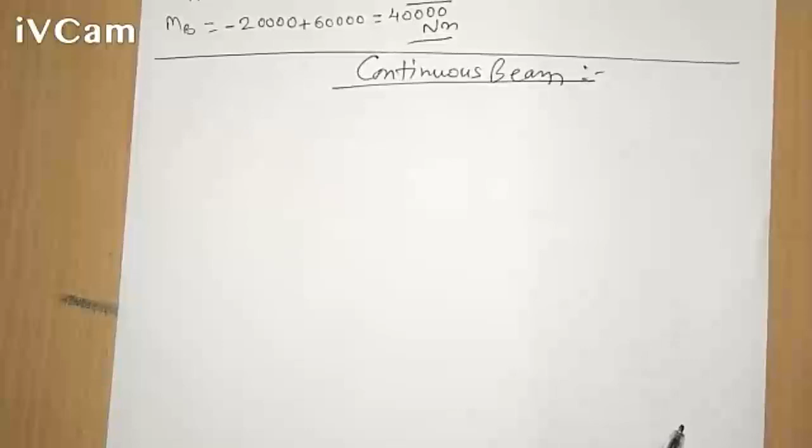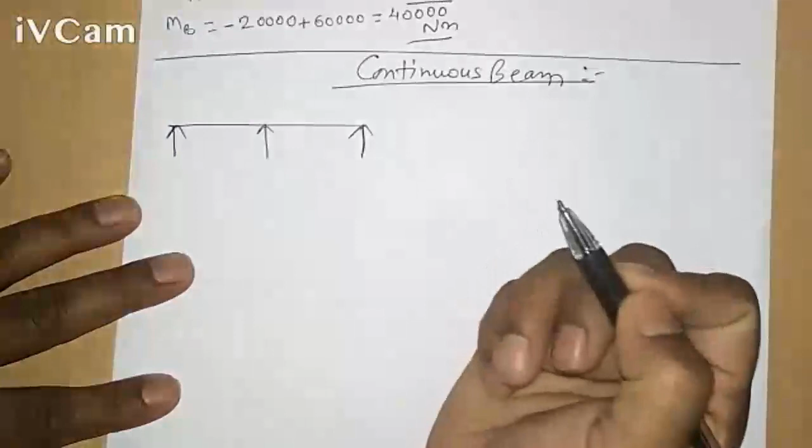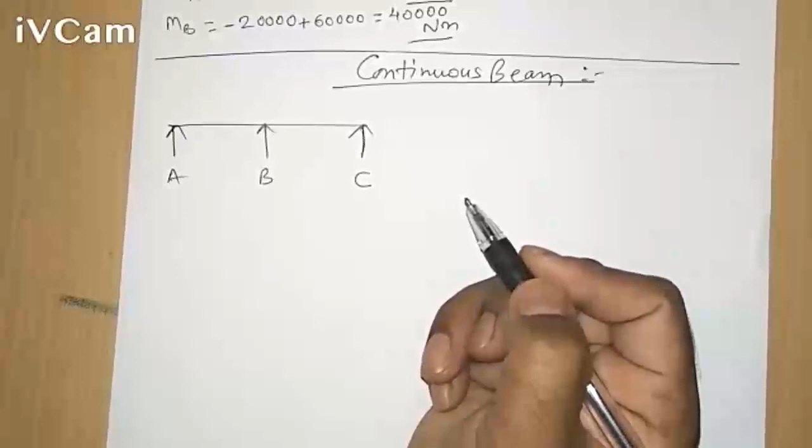Okay, so let us start with the continuous beam today. In earlier videos, we have gone through the fixed beam, and we have also gone through the analysis of the support, how to solve that problem. A continuous beam, when it is supported on more than two supports, is called a continuous beam. Suppose this is a beam which has more than two supports, so we can say this is a continuous beam having supports at A, B, and C. These are the three supports resting on the beam, and that is why we call it a continuous beam.

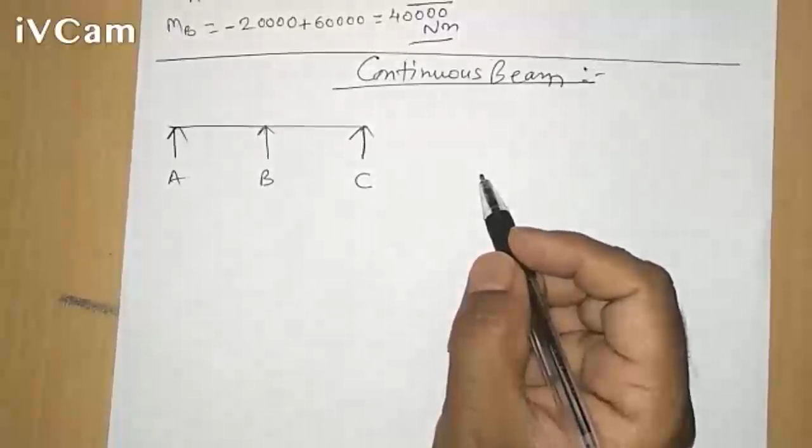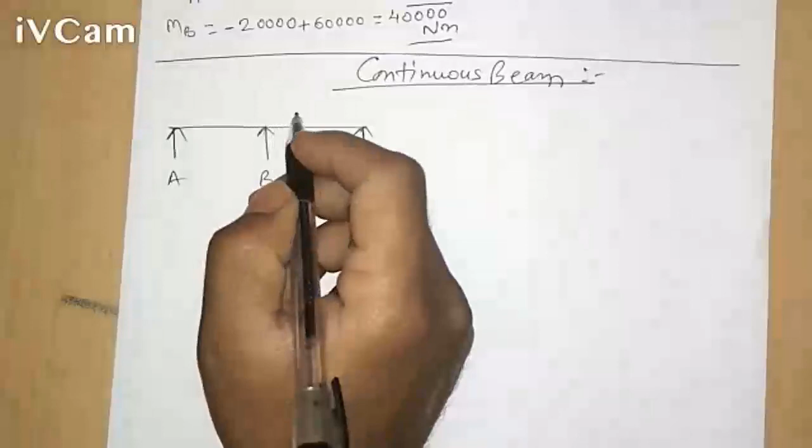So whenever these kinds of beams are loaded, they will deflect in the form of a curve. At the intermediate support, the slope of the elastic curve - suppose this is the intermediate support - if we consider the slope of that particular elastic curve for the two spans, it will be the same. If we consider this as the deflection, this is a deflected shape.

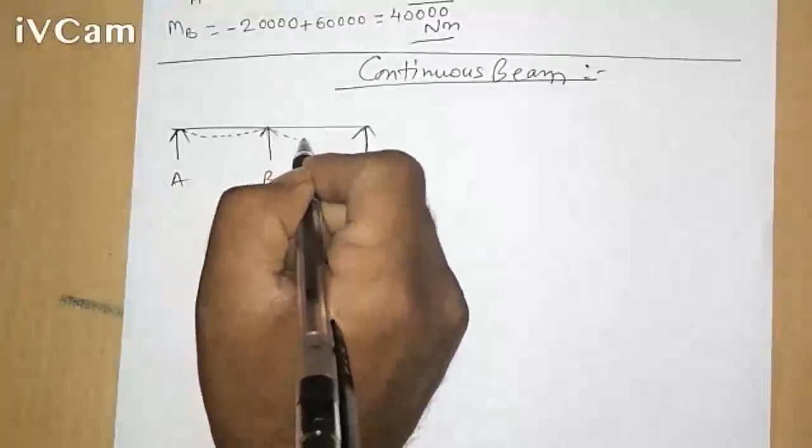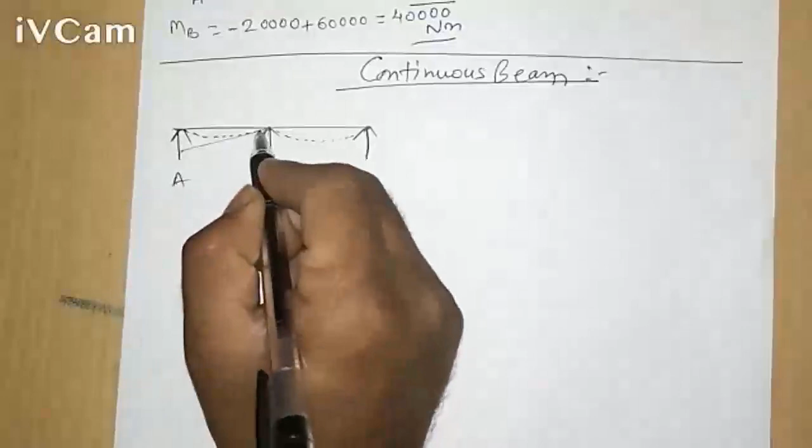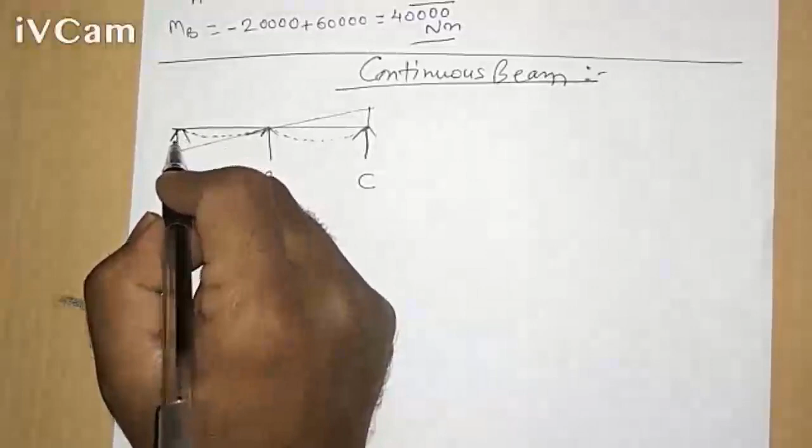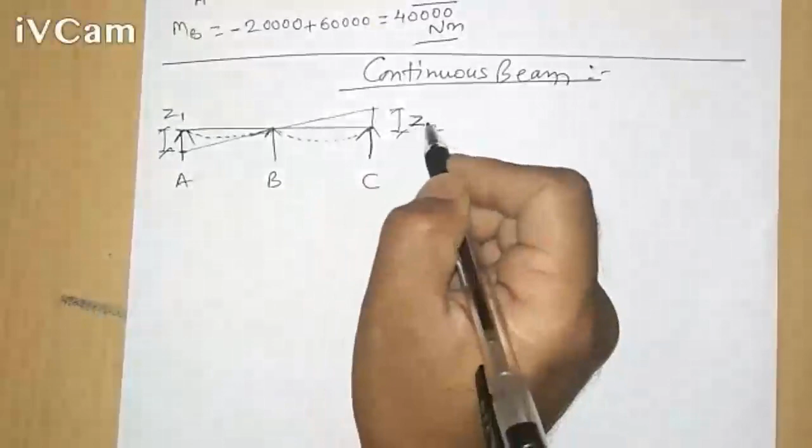Now, if we consider the slope, let us draw this - if I draw a tangent over here, this one is there and this one is there. Suppose we consider this as Z1 and this one as Z2. Let us consider this as span L1 and this is span L2.

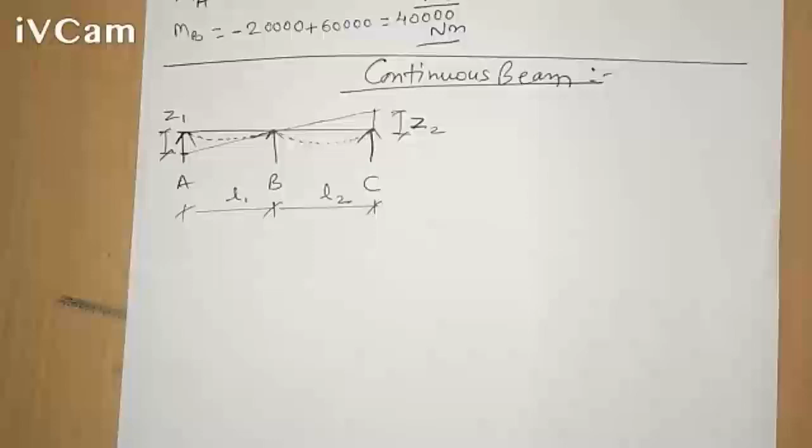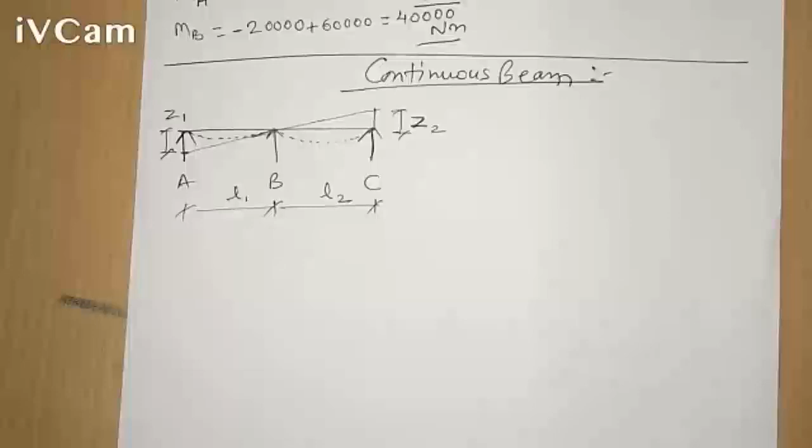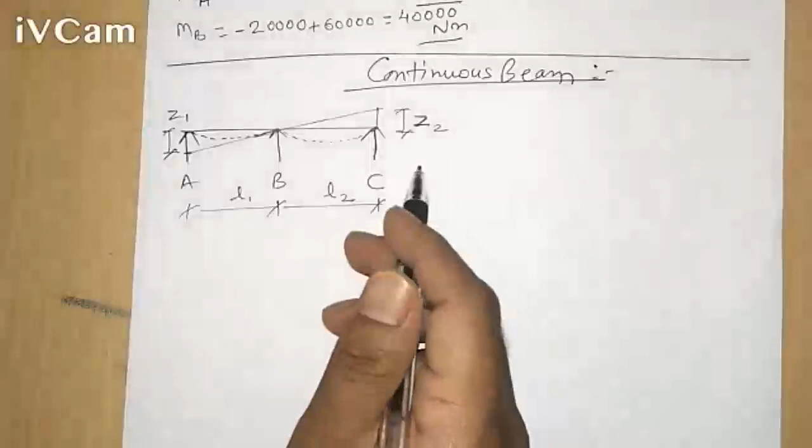Suppose if we consider that at the end support, these end supports are simply supported - in that case, the bending moment there will be zero. And if the end is fixed, there will be a fixation moment, and in that case the slope at this fixed end will be zero.

So moment of inertia - whenever we want to calculate the moment of inertia of the beam, in different spans it may be same or different. It depends upon the span, how that span is, and it totally depends upon it.

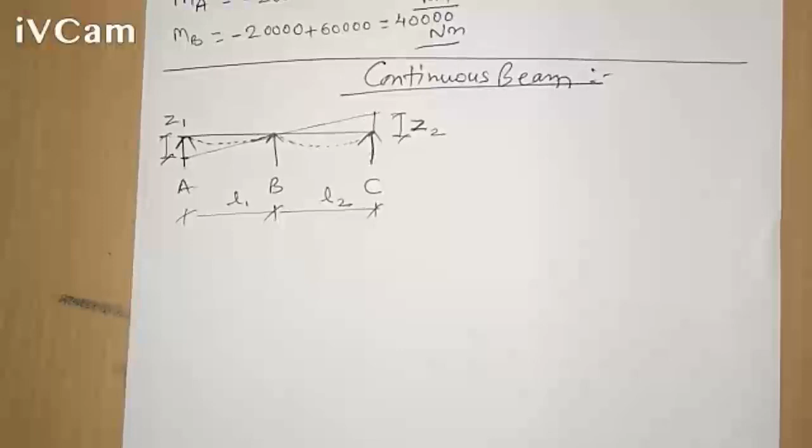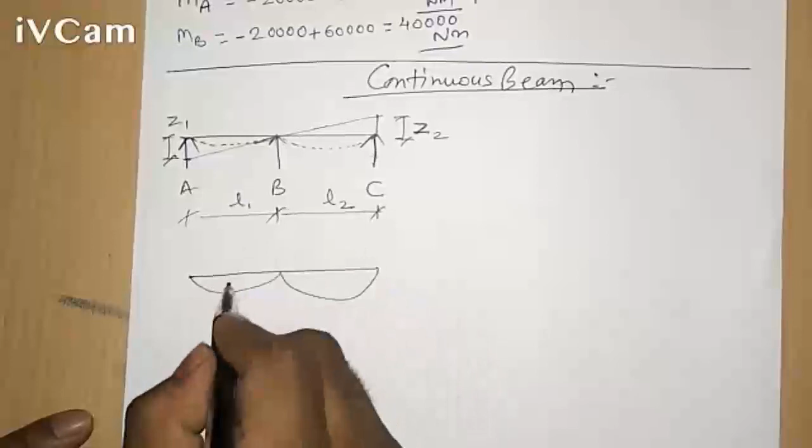So suppose we take this one, and if we draw the simply supported bending moment diagram for this beam, in that case it would be like this. If we consider this as positive, this is nothing but the simply supported bending moment diagram.

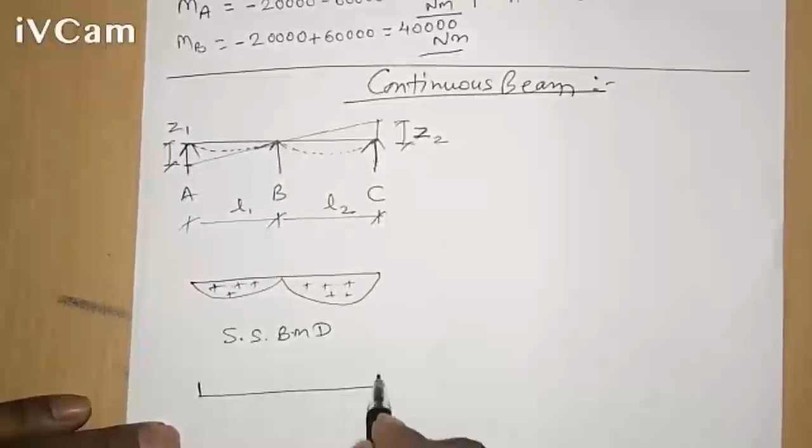While if we consider there is a fixed end at point A and C, in that case we can say there will be a fixed end moment, and this would be like this. So let us say this as MA, MB, and this one as MC.

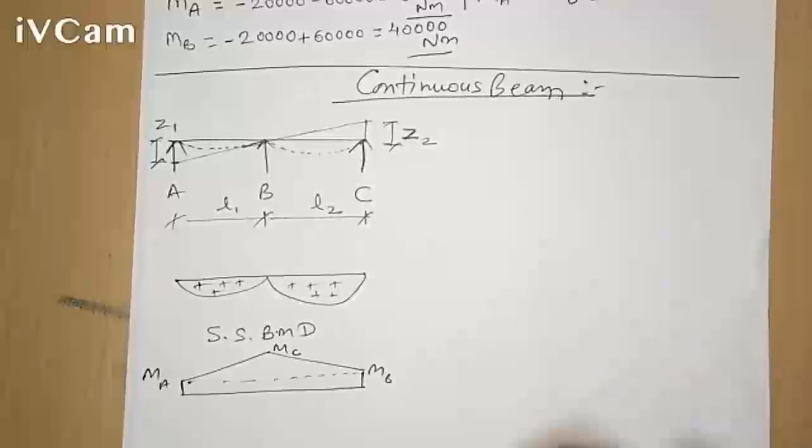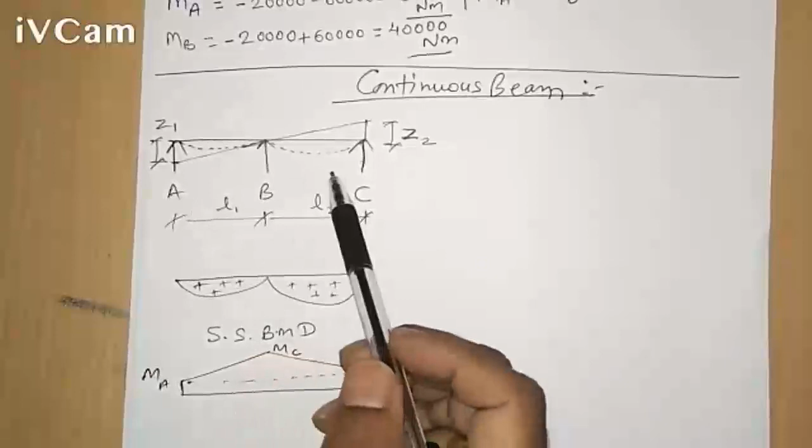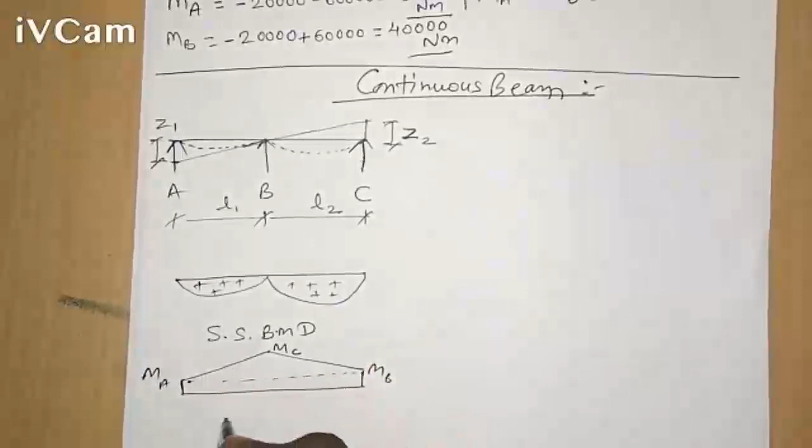So what we are considering is this continuous beam, and in the continuous beam there are more than two supports - just like here, there are three supports A, B, and C. Now, whenever we want to consider this, let us first calculate the bending moment diagram for the simply supported case and the fixed end moment diagram. This one is the fixed end moment diagram. So these are the two different diagrams you need to draw.

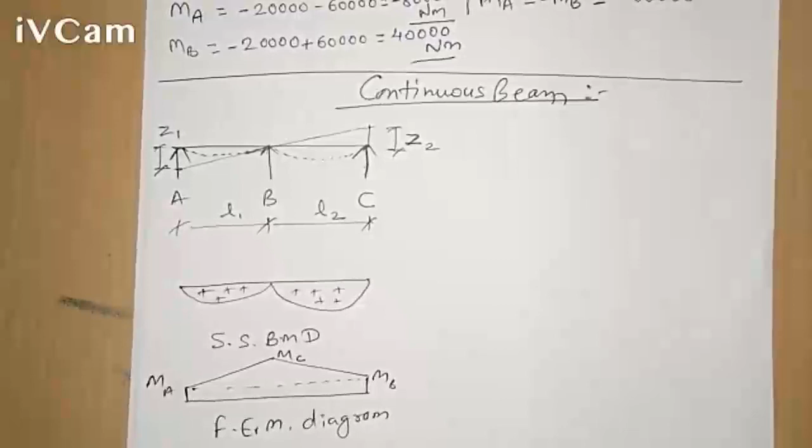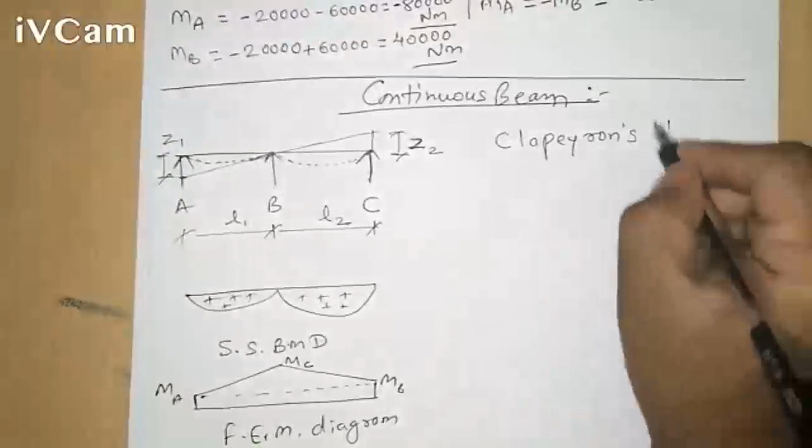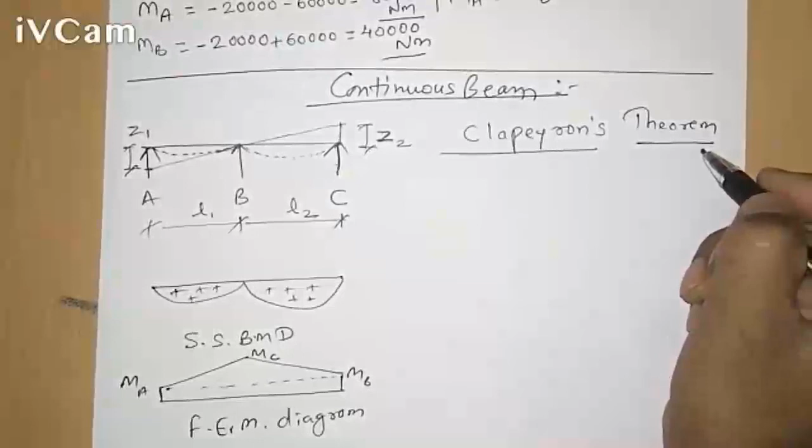And based on this, there is a theorem which is by Clapeyron - Clapeyron's theorem. This is basically the three moment theorem, it is also called the three moment theorem.

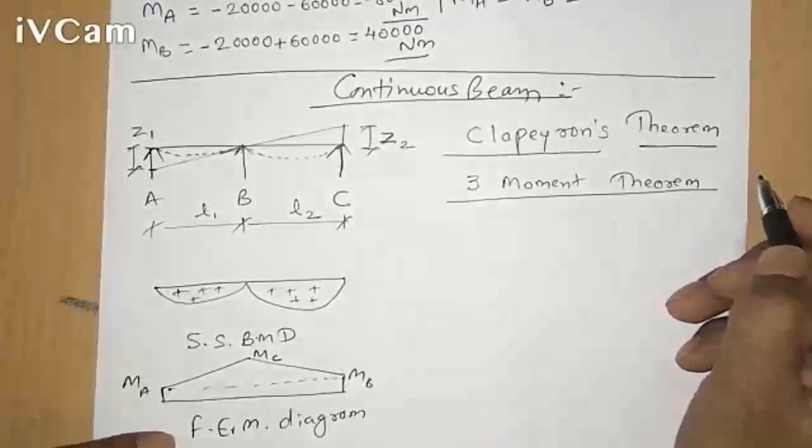So if we just consider, we will directly go on for the form of that particular equation, or the theorem that we will see.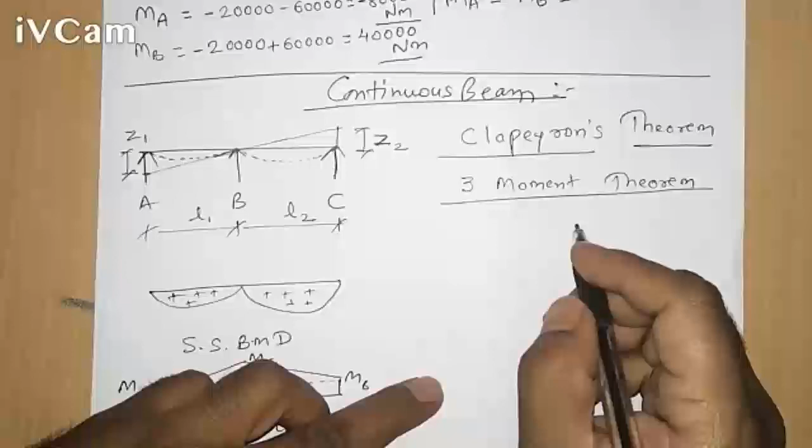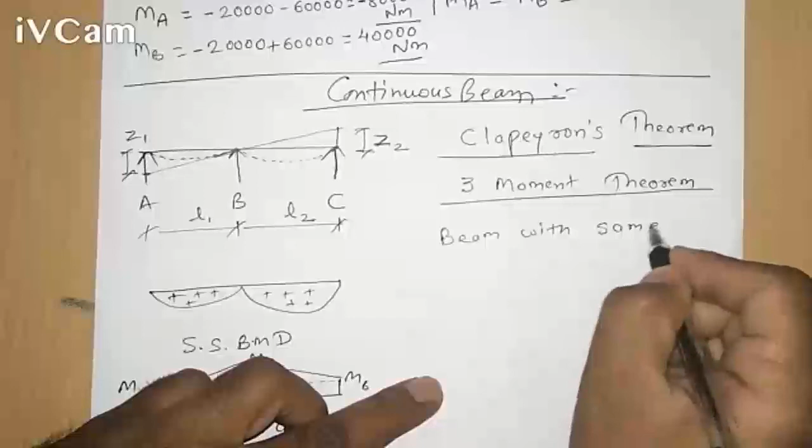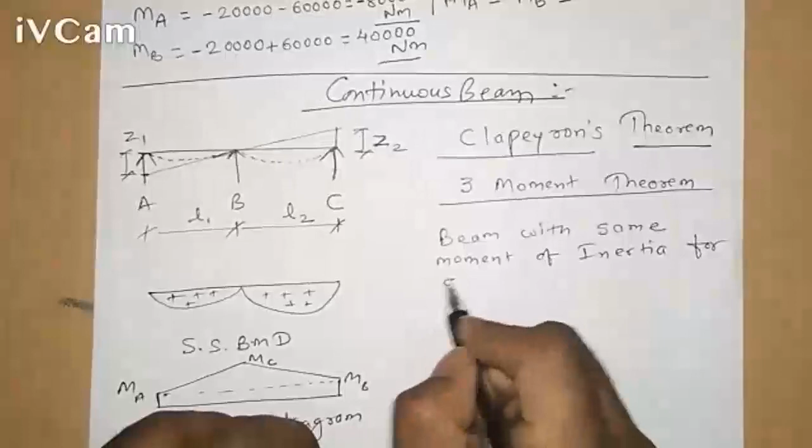So suppose there is a beam with same moment of inertia, for different spans. What does this mean? It means that I1 would equal I2, or that would simply be I in that case.

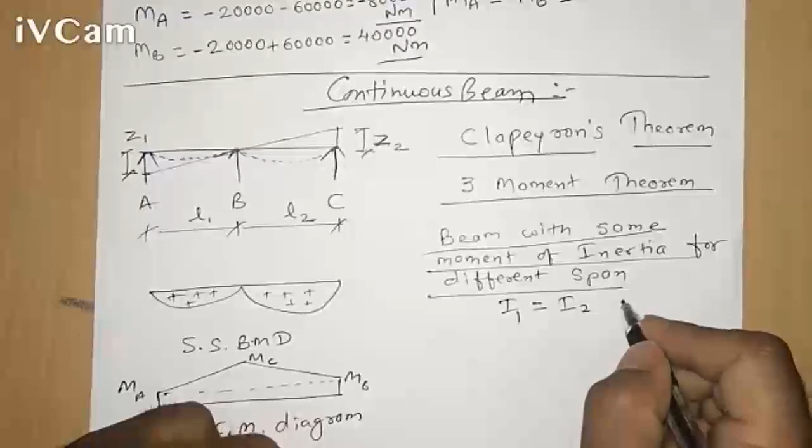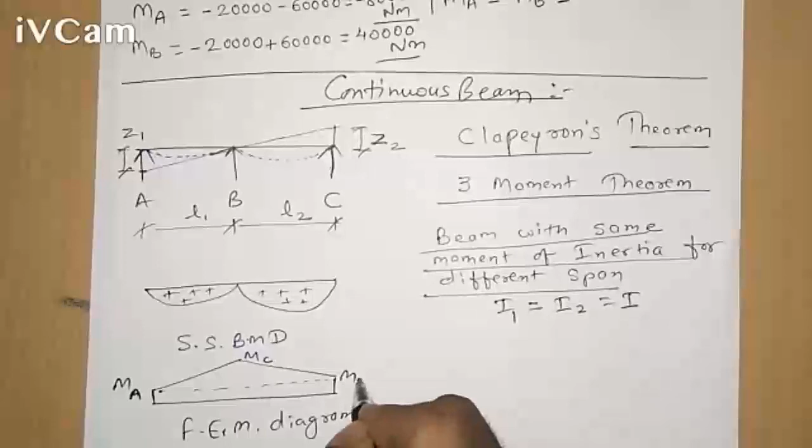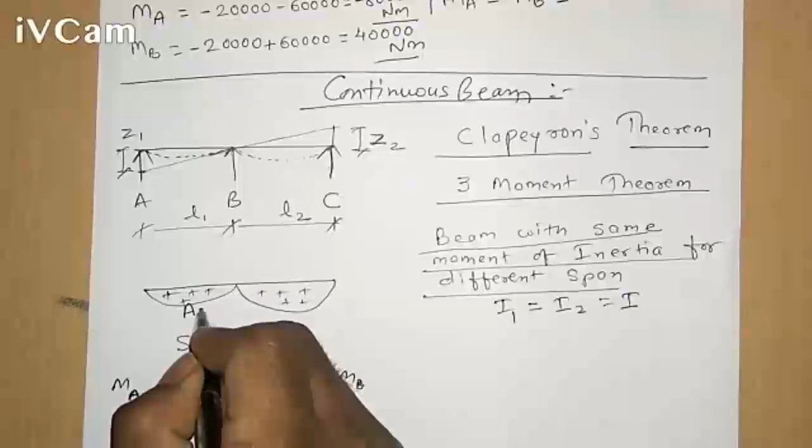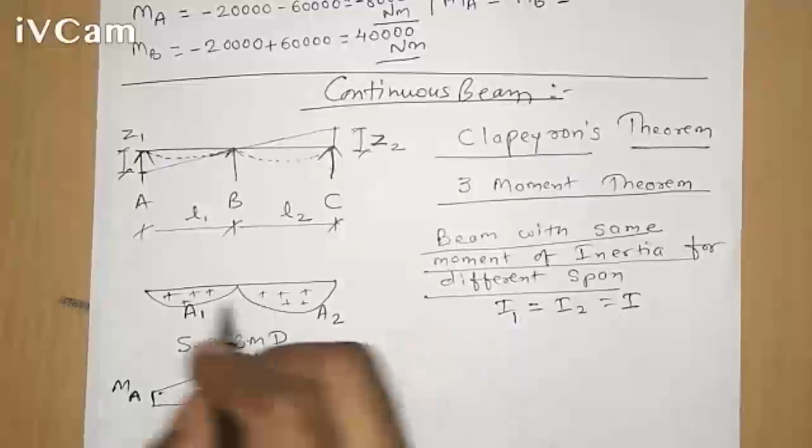Now in this case, we got here MA, we got here MB, and this one is MC. Let us consider this as A1 and this as A2. A1 and A2 are the areas of the bending moment diagram for the simply supported load, considering the case. Now let us take this one as x1 and this one as x2. X1 and x2 are the distances of CG for area A1 and A2.

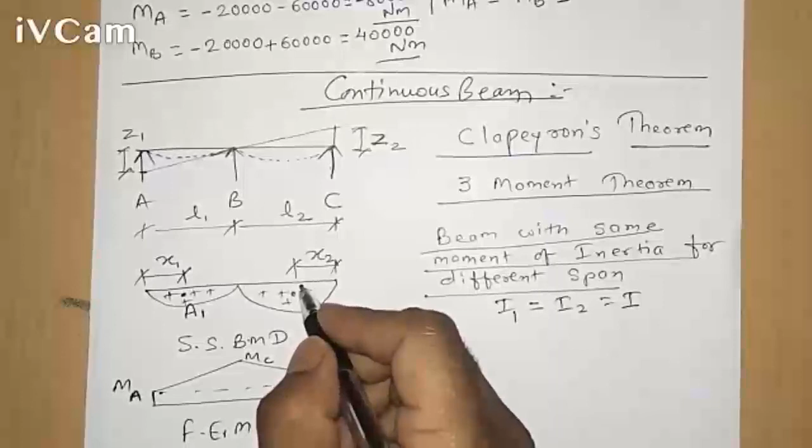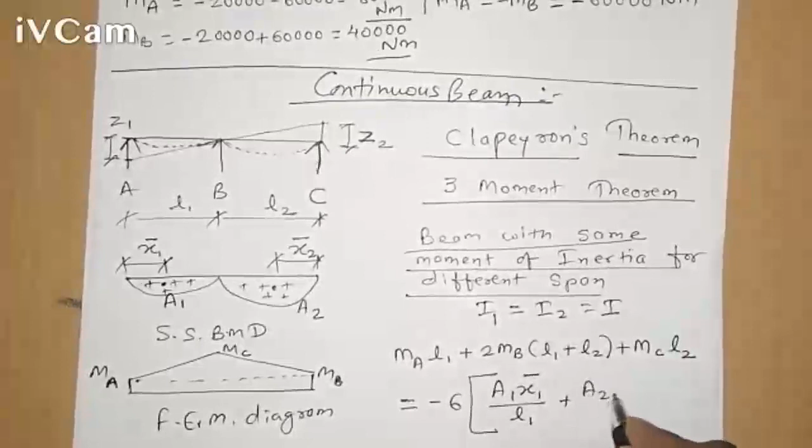Now, what does this Clapeyron theorem say? The Clapeyron theorem suggests that MA into L1 plus twice MB into L1 plus L2 plus MC into L2, this is going to be equal to minus 6 times A1 x1 bar divided by L1 plus A2 into X2 bar divided by L2.

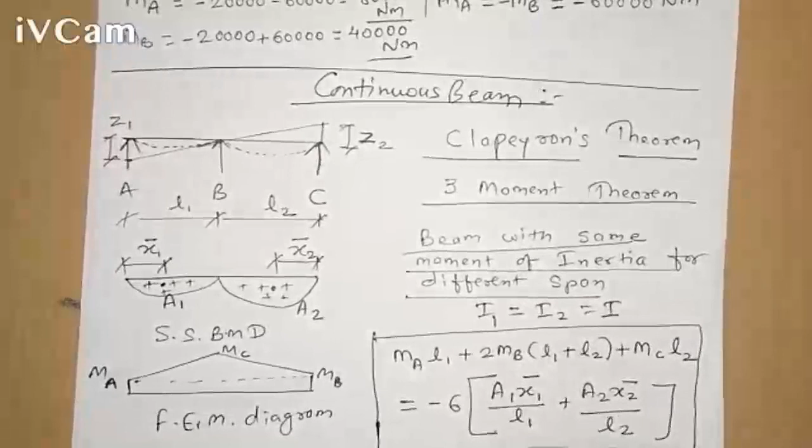So this one is the Clapeyron's theorem, and this is also called as three moment theorem, when I1 equals I2 equals I.

So you can just draw this one and write down this equation. I'll give you just 1 or 2 minutes for this.

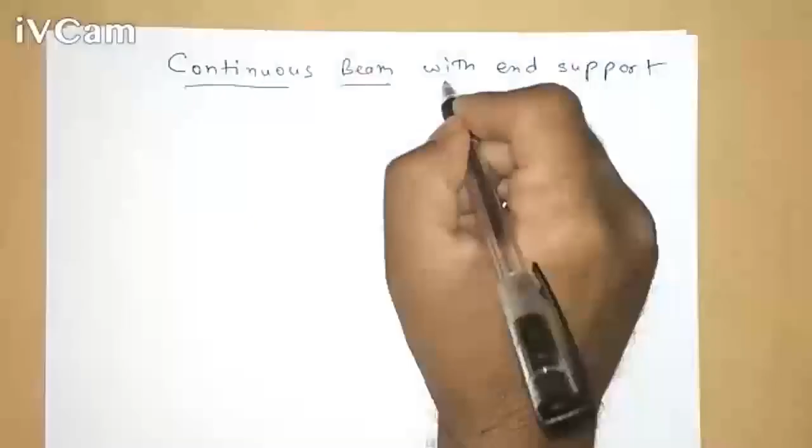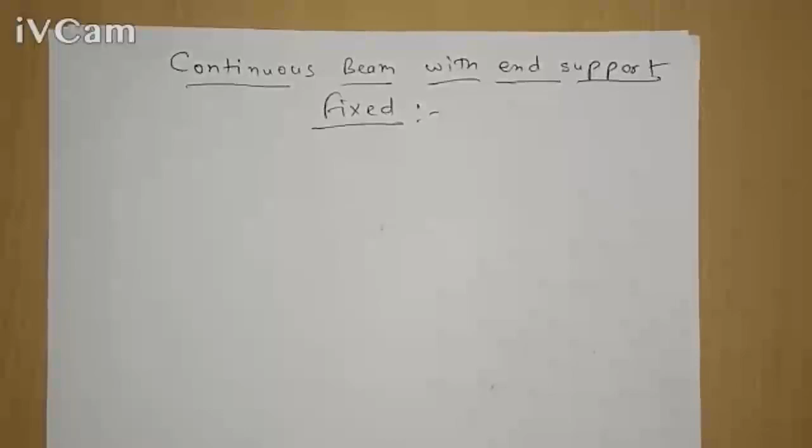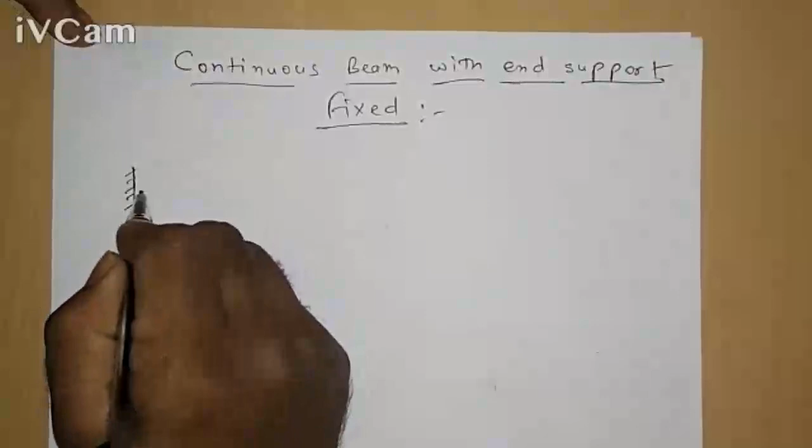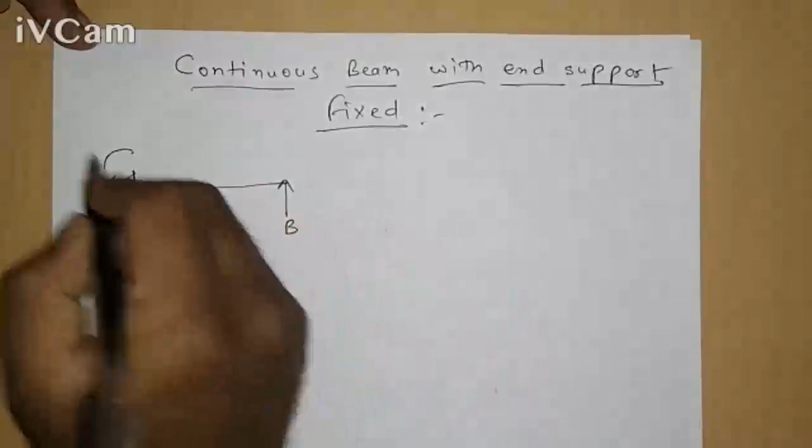So suppose there is a continuous beam with end support fixed. With end support being a fixed one. So in this case, suppose this is a fixed one and there is one support over here. Now because of this, let us say this is A point, this is B point. So because of the fixed support, you will have the moment here, and this moment will also be at this point B.

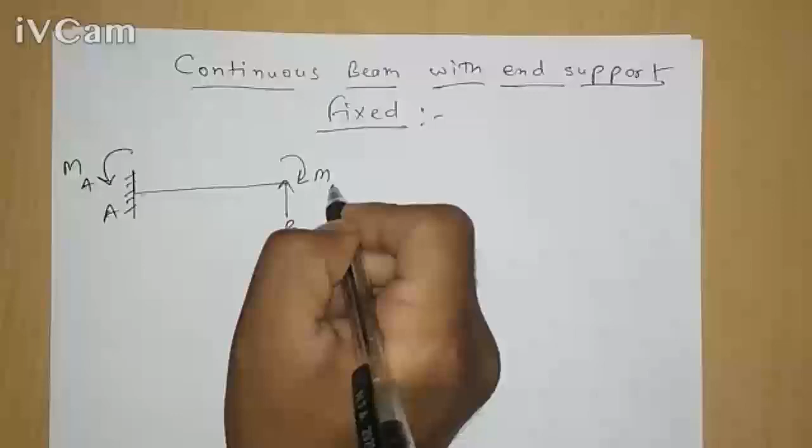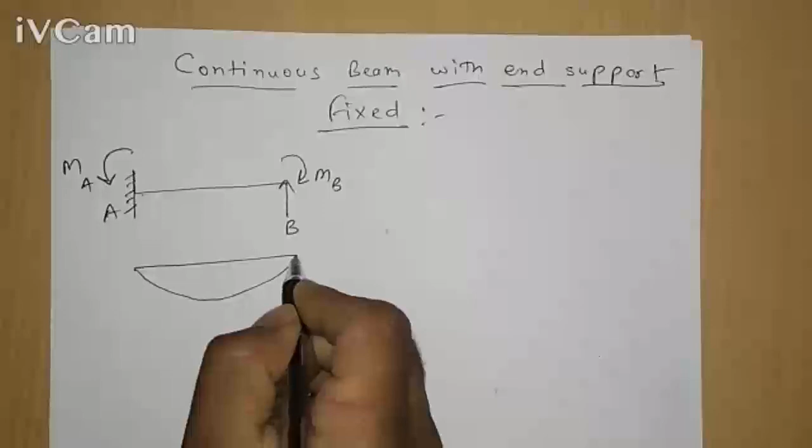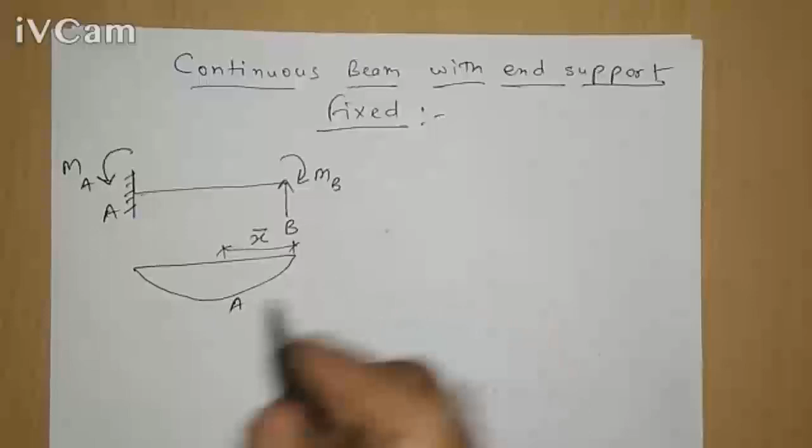So if we just draw a bending moment diagram here, it would be like this. Let us take this as area, and you will have this x bar as the distance of CG. And similarly, if you just draw the fixed end moment diagram, in that case, it would be MA and MB.

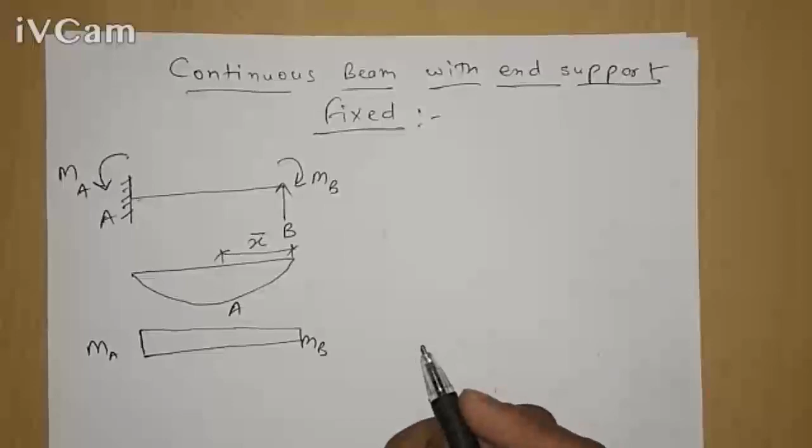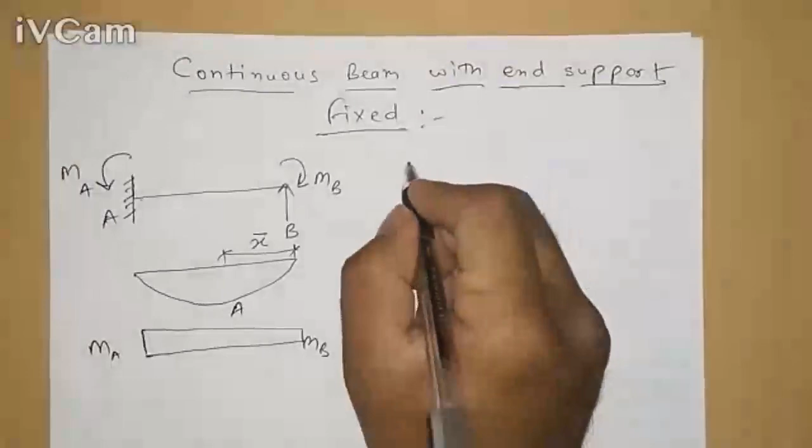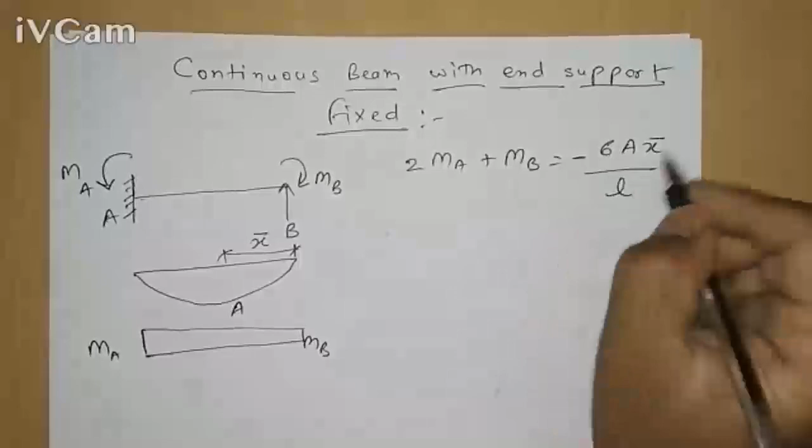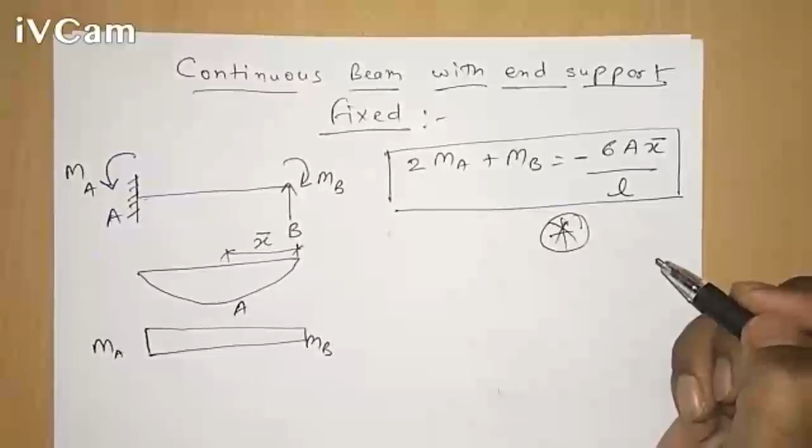So this is how you will get the fixed end moment diagram as well as the bending moment diagram. So if there is a continuous beam and there is a fixed end support, in that case, we will get twice MA plus MB equals to minus 6 area into x bar divided by L. So this is how you will get the equation: 2 times MA plus MB equals to minus 6 A into x bar divided by L.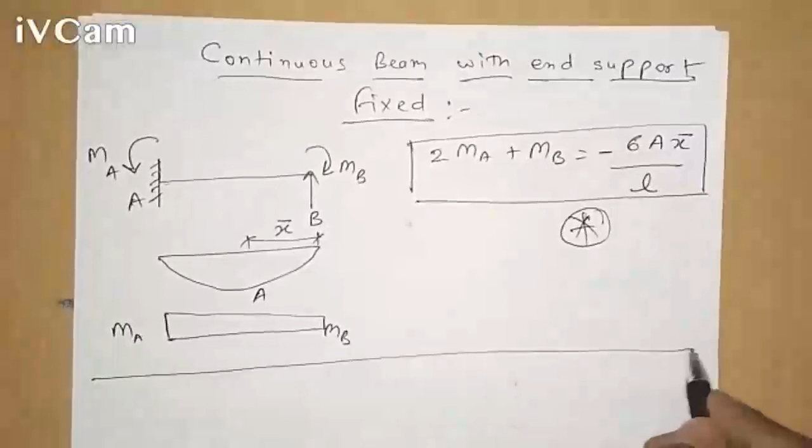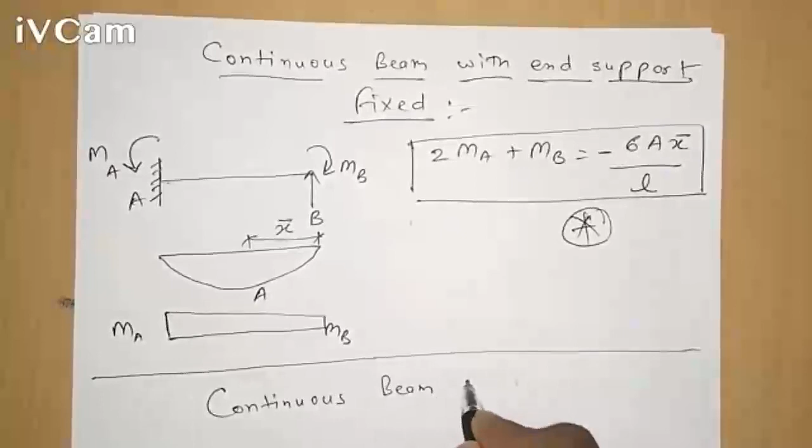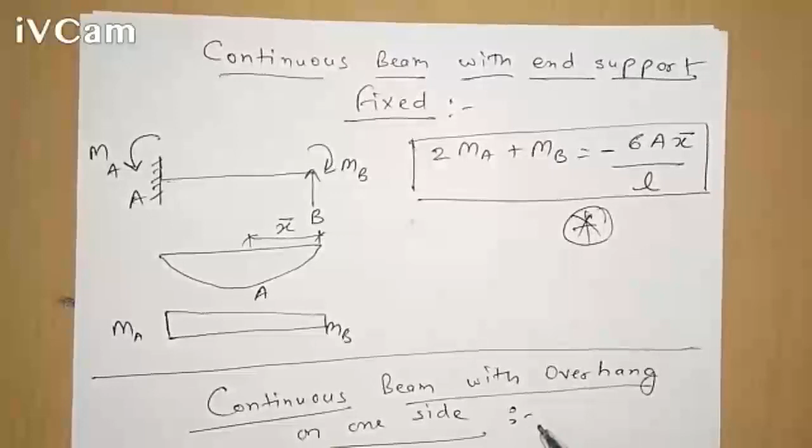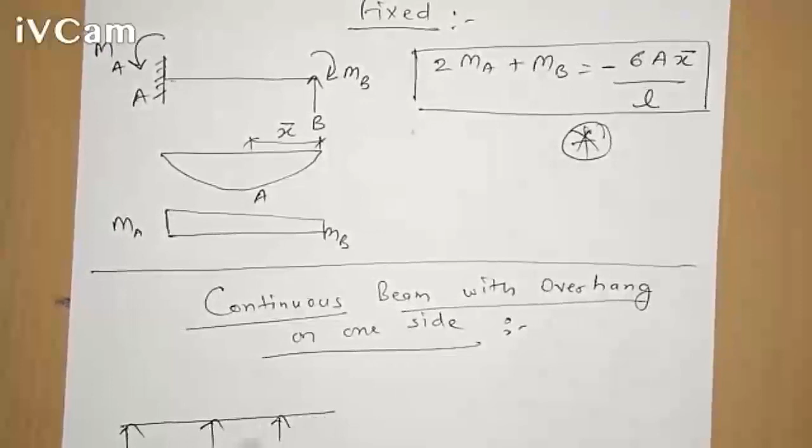Now in this there is an overhang. Suppose there is a continuous beam with overhang on one side. So what is to be done? If there is an overhang, what does that mean? It means that suppose this is a diagram, you have this continuous beam and this one is the overhang. So let us take this A, B, C and this one as D point.

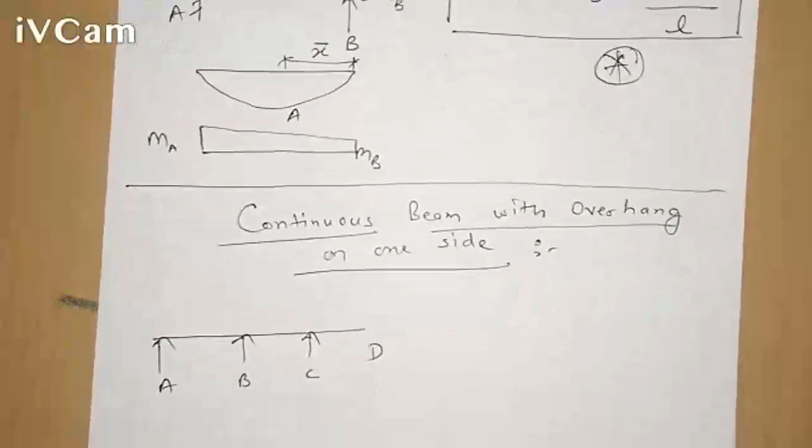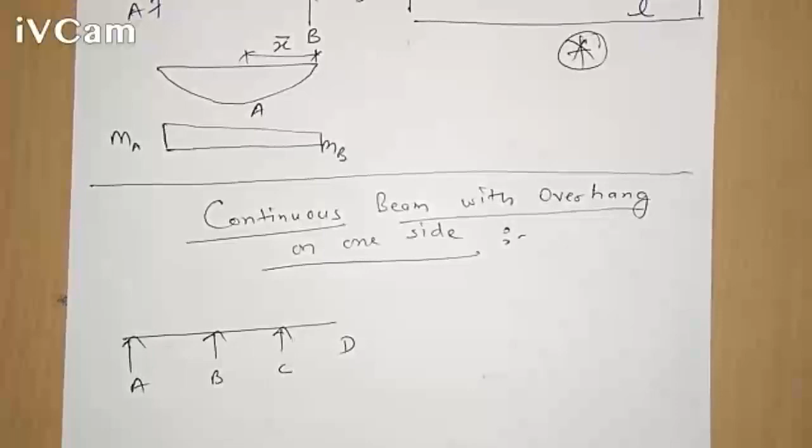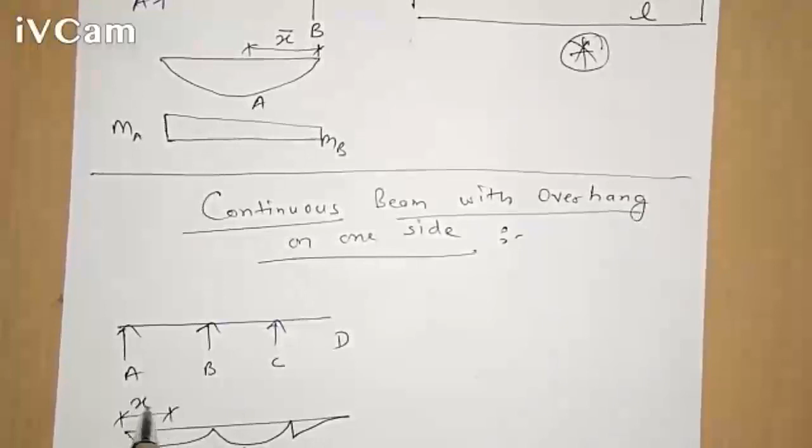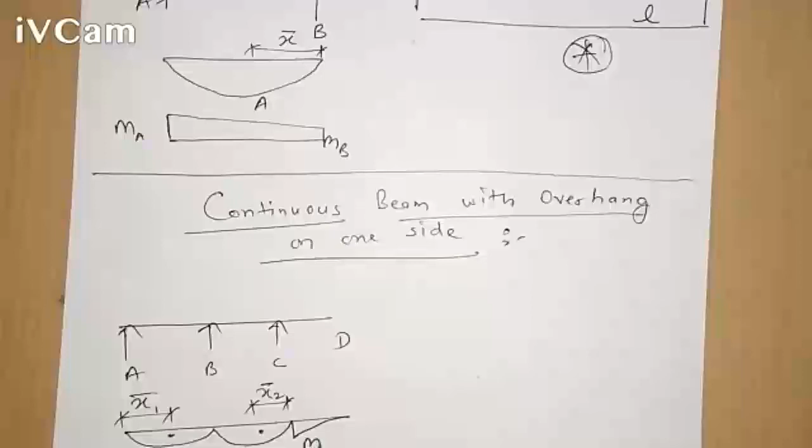So for this case, we will get bending moment diagram like this. And for this, since this is an overhang, we will get like this. Let us take this as A1, this as A2, and you will have this X1 bar and this as your X2 bar. Just consider this as moment C, MC.

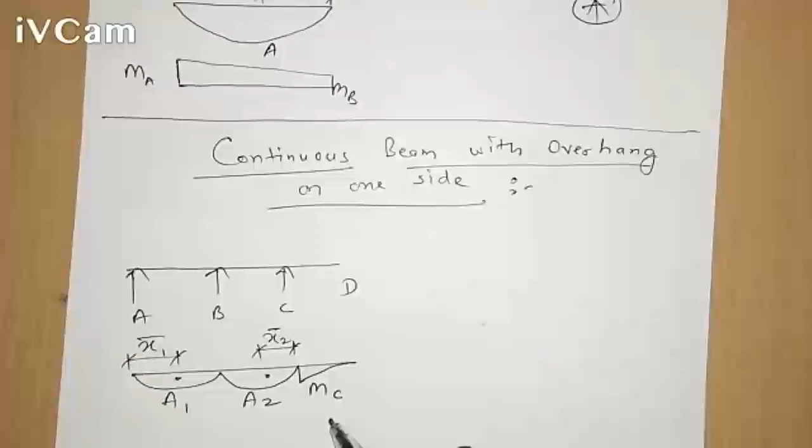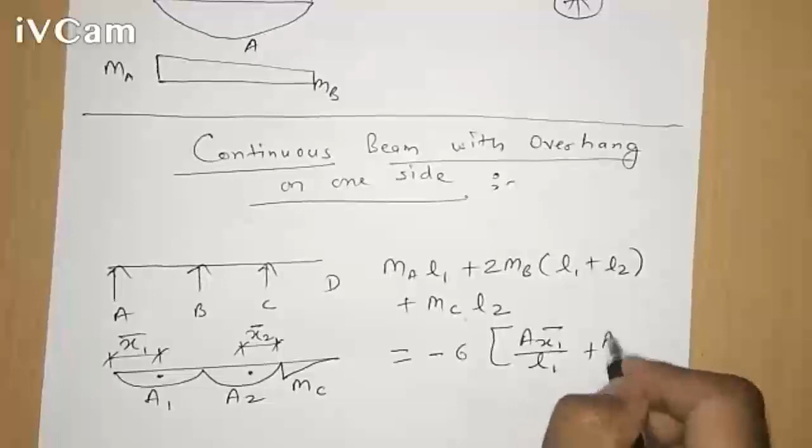So because of this, the formula would be MA into L1 plus twice MB into L1 plus L2 plus MC into L2, which would be equals to minus 6 times A1 X1 bar divided by L1 plus A2 X2 bar divided by L2. So this is how you will get these three different equations.